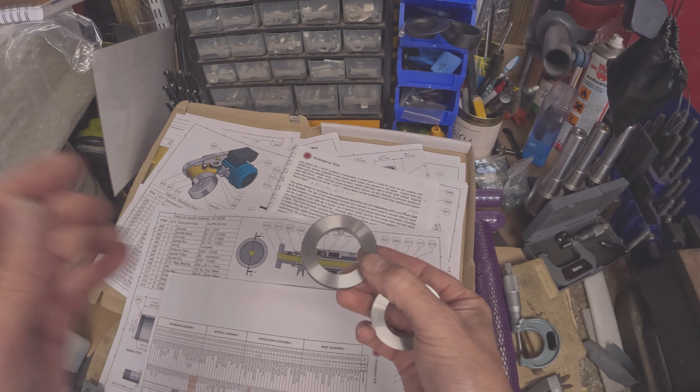Well, we've done all our other little bits. Oh, let's get it in camera. I ended up doing a bit of recording on my phone, if it turns out, because I forgot to have this camera here. This is a little nylon pip, it's looking a bit mucky.

It fits in there, fits on the column. There are little slice marks in it. It's supposed to be a bit of cushioning for when this column sits on top. Like I say, these need marking.

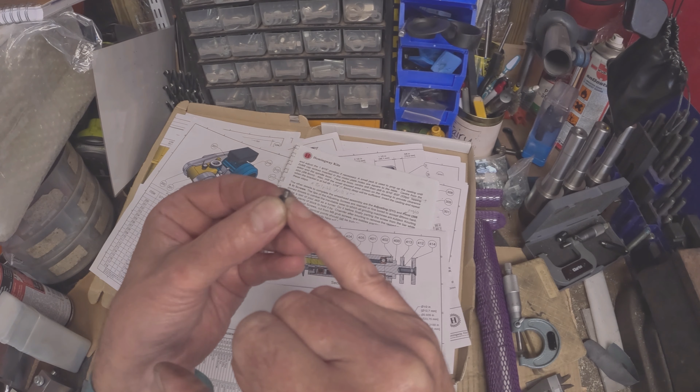I've Loctited these in now, and there were a couple of little grub screws as well with some hardened pins put in. I've not cut these down to size yet. I'm going to make a little holder out of aluminium, put them in a split collar, and nip them off at a later date, just little bits.

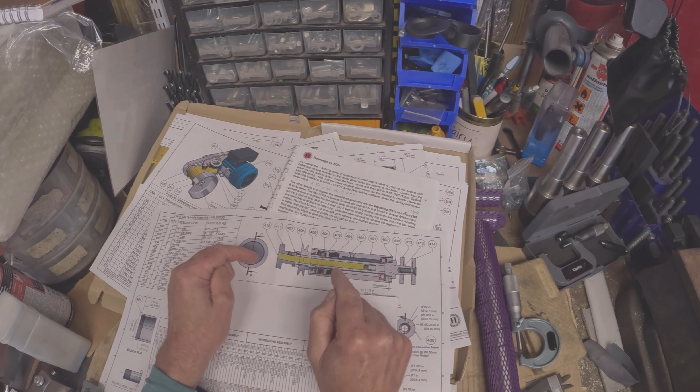What I'm going to try and get on with now is the spindle, the actual spindle that fits in this. Have a look. Obviously it goes through the housing that I did.

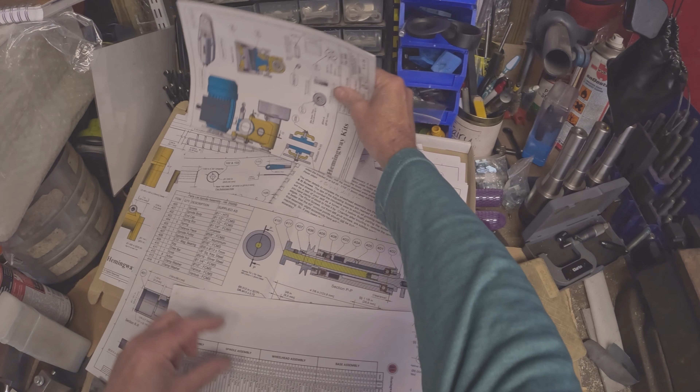Now this is the outer, what do they call it? This is it here. There's the pulley side, there's the wheel side. You've got your inner spindle actually. What will they call that? It says 412, that's an arbor. 400, that's the spindle, and this is 401, the spindle body that we'll be doing next.

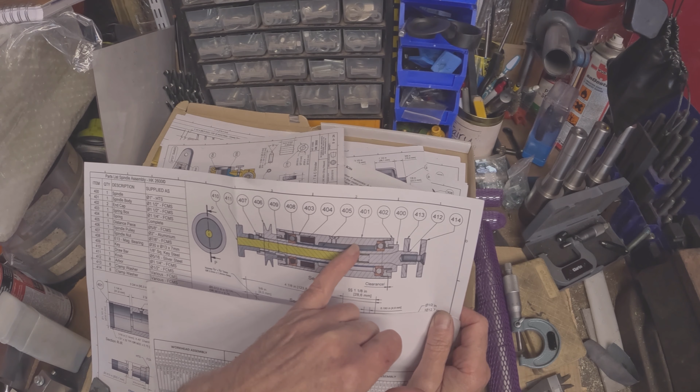Now, it does say out of 1.5 inch steel. I've been through the box, I can't for the life of me find something 3.5 to 3 3/4 inches long, so it will have to be about 4 inches long. I don't think I've used it for anything else because I can't find anything else I've used it for.

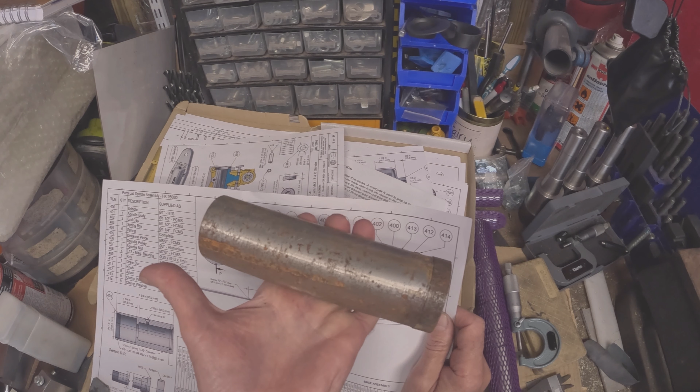I've made my arbors out of material I've got here, either mild steel or possibly EN8. It'll do. It says free cutting mild steel for the body, but it'll be a little bit harder. I think this will be EN3, which will be mild.

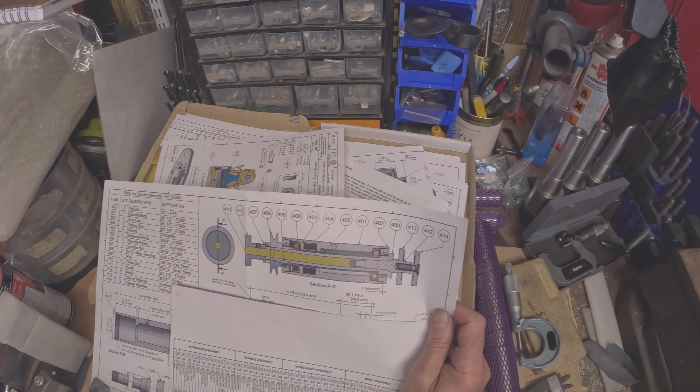Now this has 2 bearings in, 2 AC bearings, I think they're AC bearings. 408 mag bearings, I think they're AC bearings, just like I say, you can take the slack up out of them.

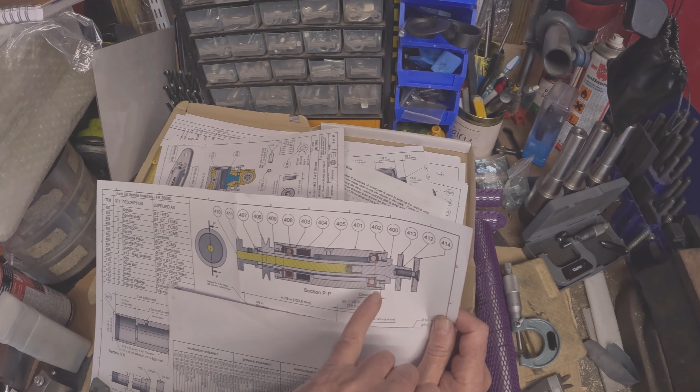Now this end, it says they are clamped to the body, the spindle body and the spindle, which in other words to me means that they're pressed in or slightly tapped in. Anything more than pressed in I think won't be doing them any good.

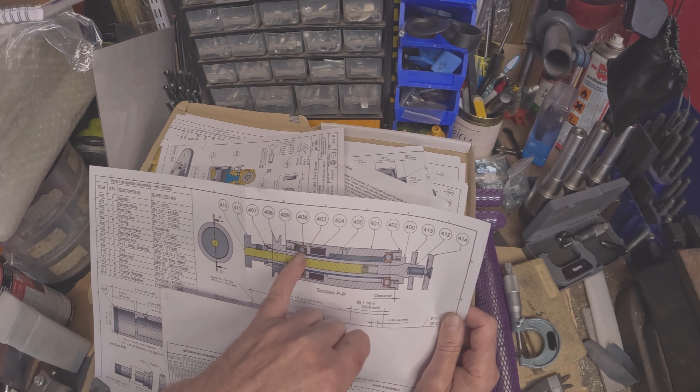This end, the inner race is tapped onto the spindle. The outer race, so I think it's supposed to be almost like a slide fit. You have a spring inside here that I think I've got to make, I'm not too sure. And then you can take the tension up with it, as I'm understanding the instructions.

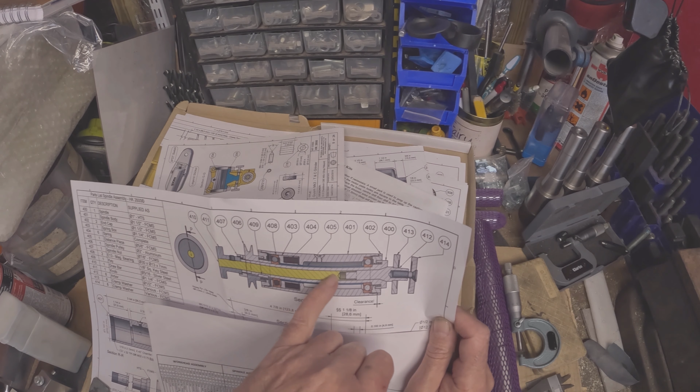Yet there is this little blue line, if you can see this faint blue line. Now that's a sleeve, and that's on the inner races. So the inner races will be a fixed distance. That outer race will touch that wall, that'll be fixed. Yet this outer race will have this spring adapter in, and I'm assuming there's a little bit of play.

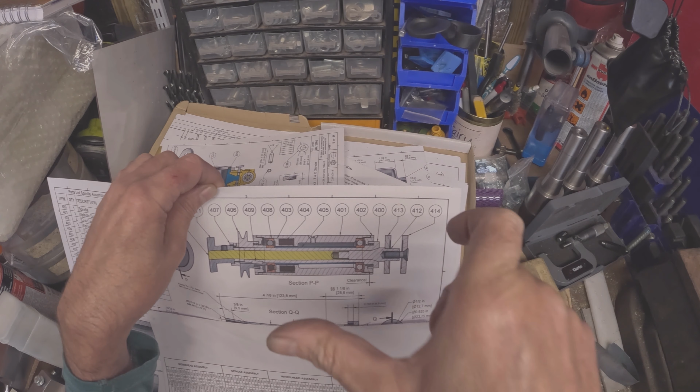It says, it does mention in the book there, you can just take a bit like end float up, and it does assist it for when it warms up, cools down. It's supposed to keep a constant pressure on the bearings.

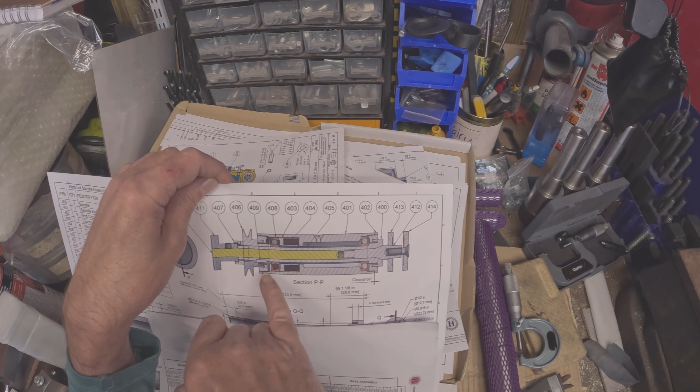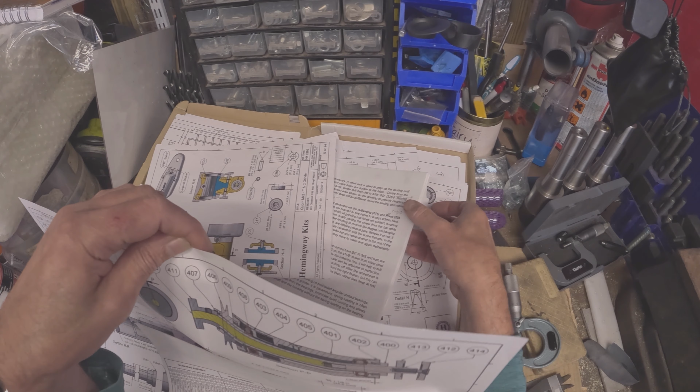Now we've got some very fine threads on either end here. I think I mentioned before what I'm going to do, these end caps on either end as well, obviously for the thread, but I'm going to cut first off just to size. I think it's 32mm by 0.7, or the imperial equivalent, whichever you want. It does mention something in here, it goes on about having a spring box, like I say.

Yes, it mentions something. You use magneto bearings, and it tells you about the length of material they give you, turning it between centres. Well, I won't have to, as long as I get the thing right.

I'll drill it out first, relieve it all, but as long as I get it running parallel, part it off, I'll leave as minimum as possible, and hopefully nothing will distort. We'll soon find out anyway.

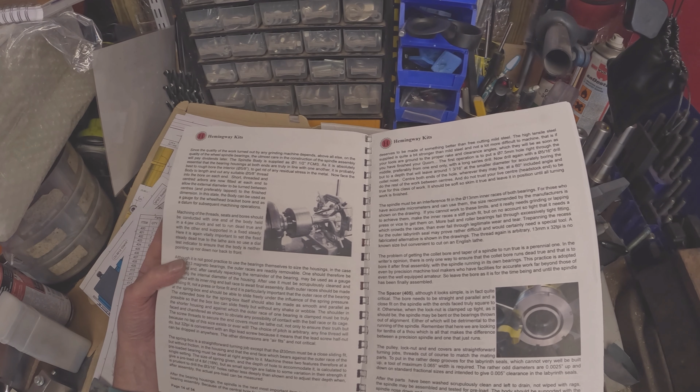Trying to find where it says about the thread. It does mention somewhere about the thread. Can't think. Never mind, we shall get on with it.

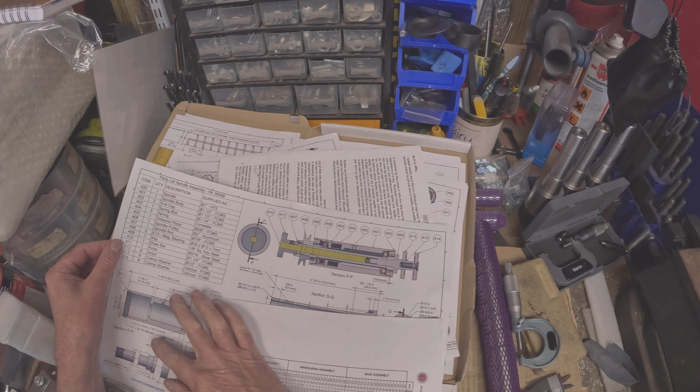There we go, it's 32mm. Let's click you back on. It's 32mm by 0.75, or 1.25 inch by 32 threads per inch. My lathe will do either, so since I've got some fine metric tips, it's going to be by 0.75.

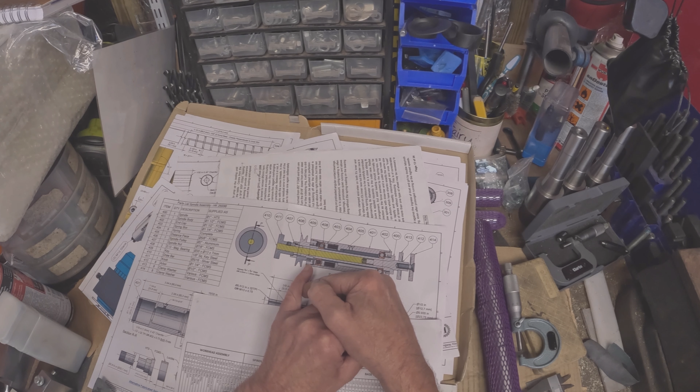What I'm going to do first is turn myself down and make a male gauge for the thread, and then when I screw cut the body, I'll use the gauge. I'll obviously have to touch on, go down my nominal depth.

I am using indexable tips, so they will top out, obviously get to the crest of the thread. I'll go down the fixed amount, and then the inner thread will match the bung that I've made, or the gauge I've made.

Then obviously when I make the end caps, they'll be turned to make sure they screw into the body. So it's a little bit of customization in a sense, but that's the only way I can think of doing it. There's no fine threaded nuts for this kind of thread. It does mention it's a kind of custom thread, a very fine thread.

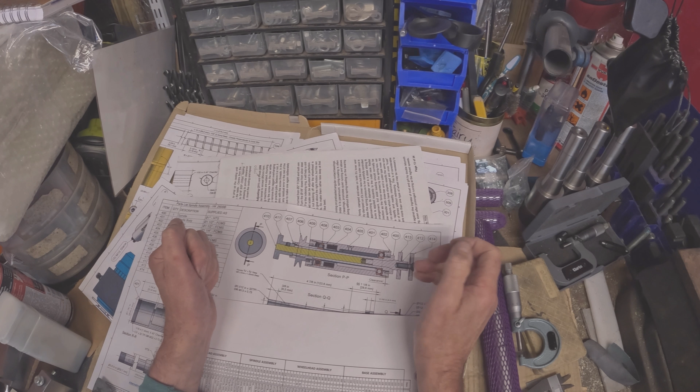So the first thing to do is get a piece of material in. I am going to relieve it through 5/8, and then turn it, get a centre in the end. I'm going to turn the end ever so slightly so it's not rough, and do the OD the full length, attempting to get it as parallel as possible.

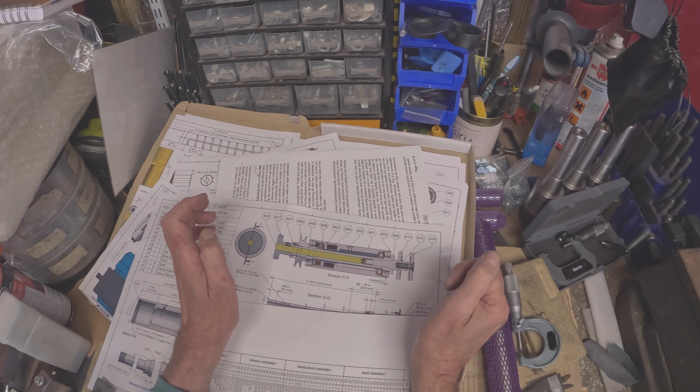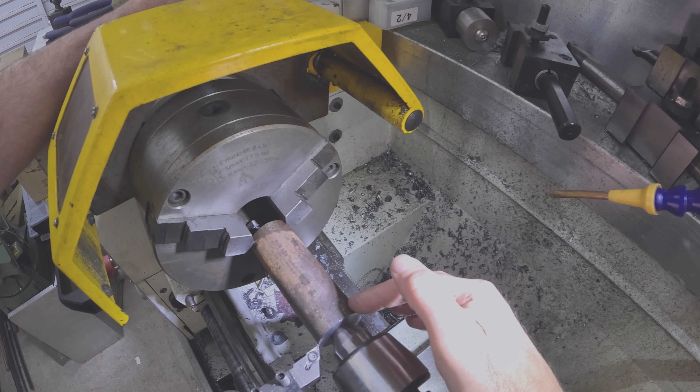Anyway, let's get this thing on the lathe. Right, I've got this piece of material now. I've gone through it with the 5/8 drill just to relieve it.

I'm just going to skim the face up as much as what I can here. It's long enough to hold. I'm not bothered if the centre isn't true at the moment. What I want to do is take a skim, get it parallel from there to there, and then work down to the size.

I think it's 1 3/8, but it's going to be a finished size for a good slide fit in that top bracket. And then, like what it says in the instructions, I can work holding this, clocking it up either end. It tells you to flick it up to length.

It's done in a 4-jaw with an arbor on smaller lathes, because you obviously can't get it down the spout or anything. This will be perfectly fine for what I'm doing, so we'll get it down to size.

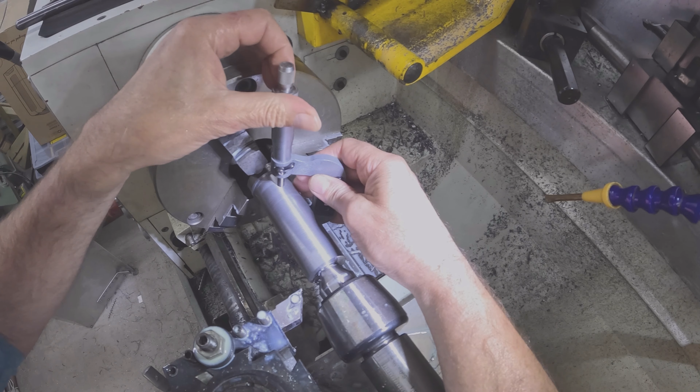Right, we've altered the centre a few times. I managed to get, I'm aiming for 34.9, but as you know, there's a bit of lapping needed to make it fit. So I've got 34 point, just over 34.93, nearly 5.

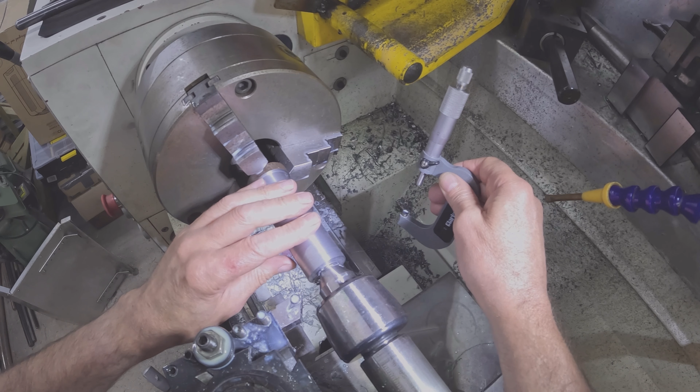34.94, so there's a little bit of lapping to go on now to get the bracket to slide on.

Right, so obviously a bit of lapping in later on, and this is the bracket fitted on there. And yes, it does go on both ways. That's quite good, I'll have that.

I shall just go over that with a bit of Scotch Brite, because it was nicely shiny before.

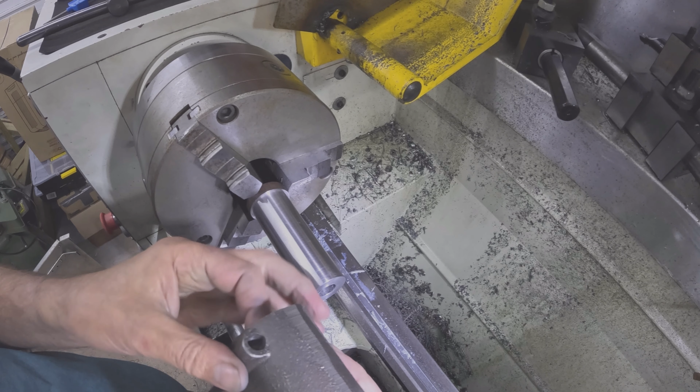I'm going to do it lightly because the OD is now finished. In essence it is held in there, and then the spindle goes inside it, but even so I don't want it to grow, shrink or anything if I can help it. I left it long enough after I drilled it, cooled it down, and it's quite cool now anyway. So a little bit of polishing, then on with the rest of it.

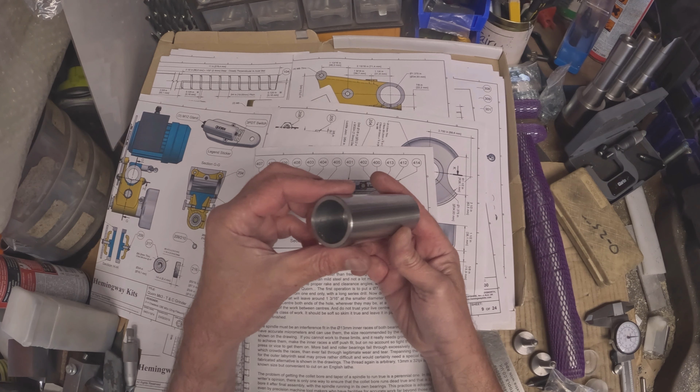And I've done the counter bore, the big counter bore. I've left a millimetre in it. I took it down to depth. No, minus 4 thou, I think. Just left off 4 thou. And just left it, let it normalise.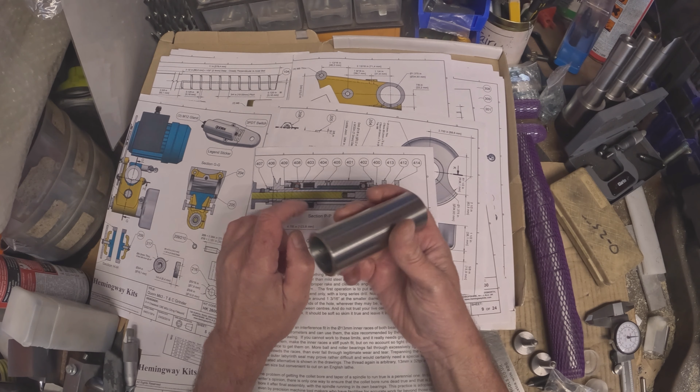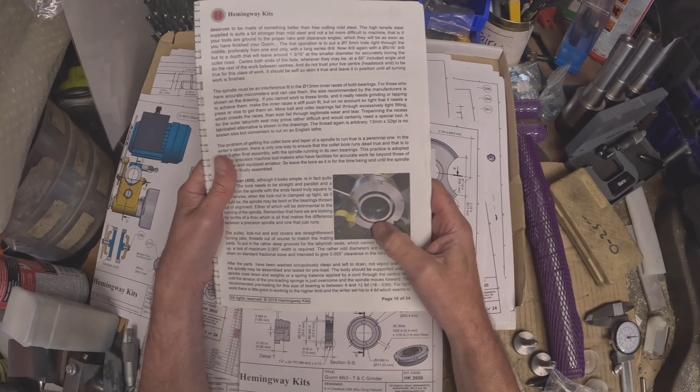Now, it's going to have these threads in either end. I am going to make myself a gauge. What I'm going to do is, it doesn't explain it in here, but if you look at this drawing, it's very well when it says about these labyrinth seals here. You will, what is it?

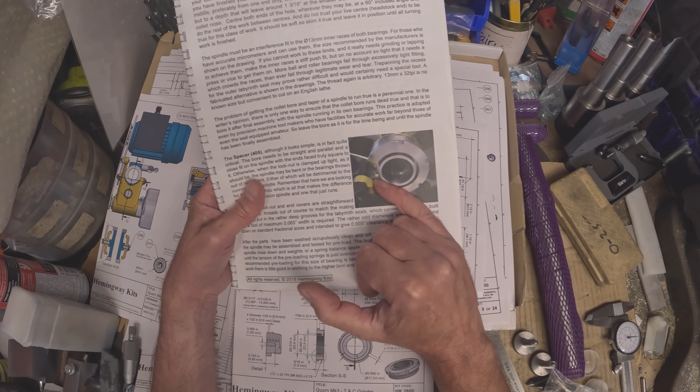They cannot very well be built up. A tool of a maximum of 65 thou width is required. That's all well and good. If you look here, he's got a nice indexable tool on a holder with a carbide end by the looks of it, that's all formed up and ready. I haven't got one of them, so I'm going to bloody well make one.

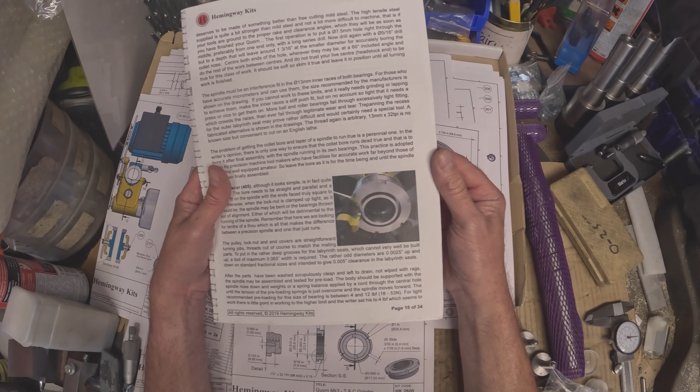It's 4.9mm deep, that. I can see maybe a couple of attempts at this, but anyway, looking at that, it looks like it's then been screwed into the body when having this side done.

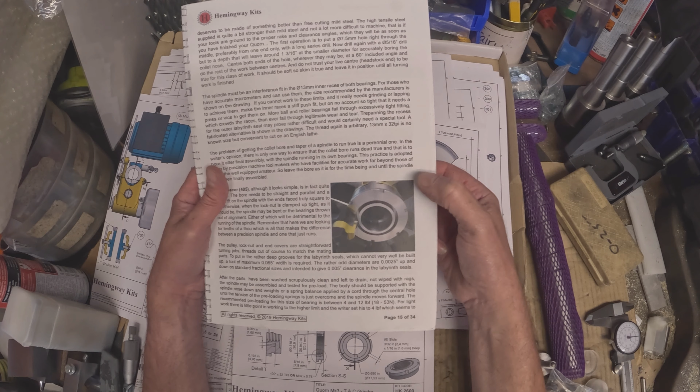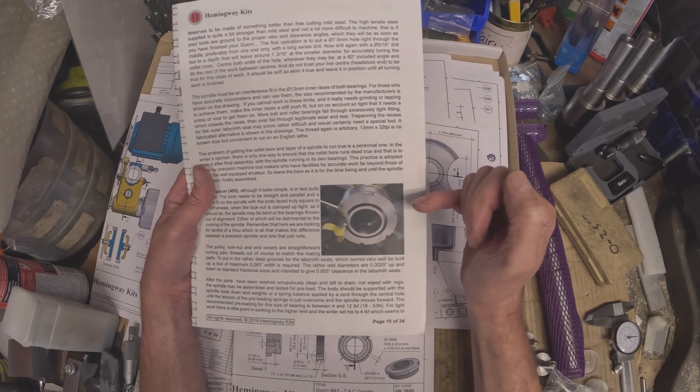It doesn't mention anything, but looking at it, and if you think about it, you put your body into your chuck, you can see on the drawing here he's got some very fine pieces of maybe copper or something. He's tapped it true, got it true in a 4 jaw, looks like a 6 jaw in there possibly. But he's got that outer spindle body running true. He's screwed these in.

Then I would say, looking at it, if you finish turning off the bore of these, they call them lock nut covers, and put the labyrinth seals in there, they should effectively be running fairly true with this body, because you've got 2.5 thou clearance in here.

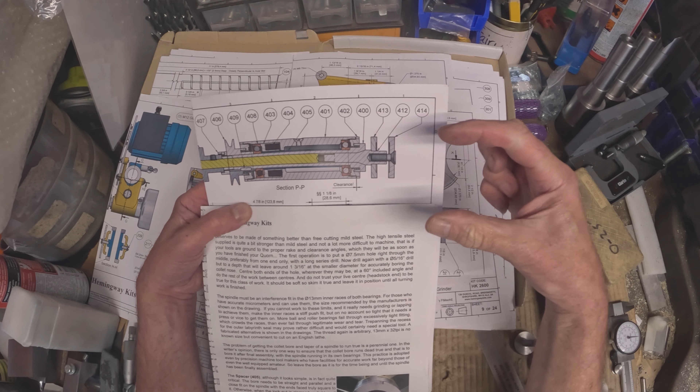How the labyrinth seal works, this spindle slides in slots. This slot here, it's sliding over it, and it says it will run, but when you actually look at the sizes, you've got about 2.5 to 5 thou clearance, which isn't a lot.

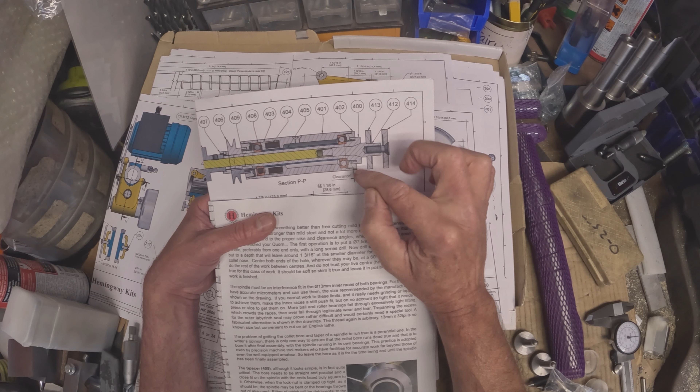And I would say the best way to do it, to get it as concentric as possible, is the same as them. I'm going to do a dummy one of these now with a male thread, and I'm going to just do it to size, and then I'm going to screw cut this to the dummy I've made, or the gauge, whatever you want to call it.

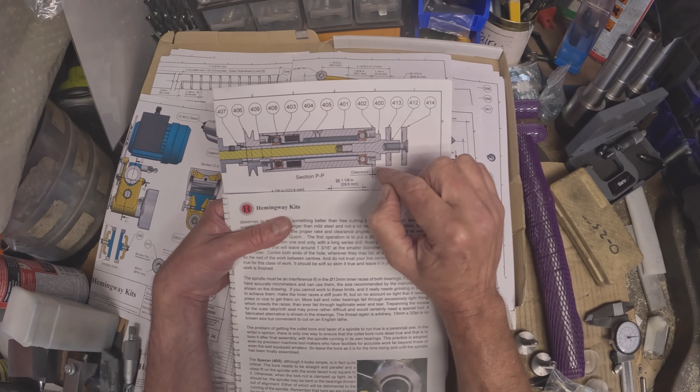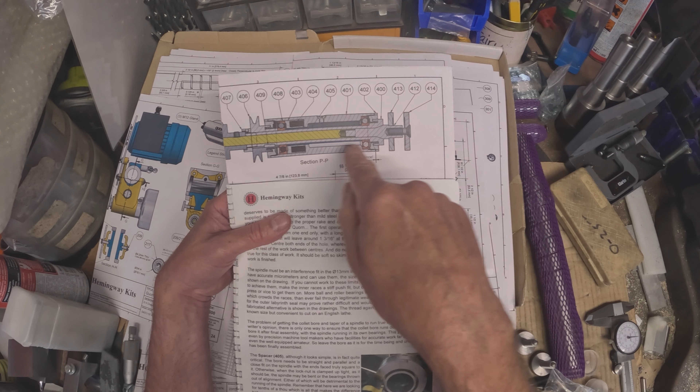And then when I screw cut these two, I will use this as a gauge against them. Hopefully both ends will then fit each other, and then I think I'll be doing what they've got on here, is finishing them off and this groove while it's held in the body.

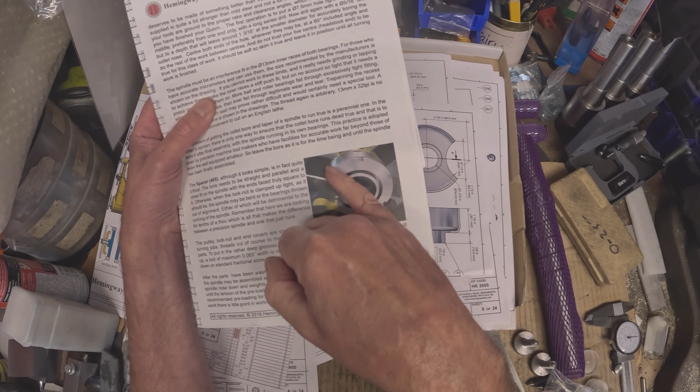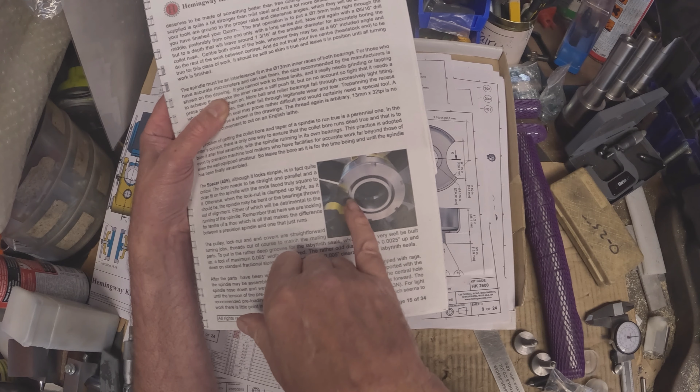I don't really want to, because I don't know how much strain or anything else it's going to cause when I start to do this groove. I'm going to have to be very, very careful, because I don't want to put any pressure on these threads, and I don't want it to lock up either. But I might just have to give it a go and see what happens. Anyway, we'll crack on, see what turns up.

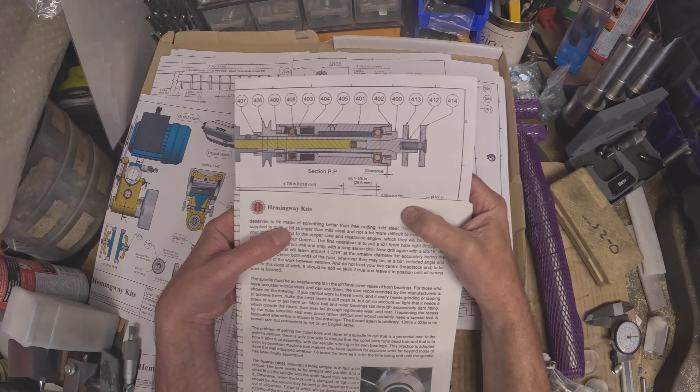I've got this piece of free cutting mild steel for making these locking nuts at the end. Clocked it up with inside a thou. It does run luckily within a thou.

Rough bored, so I'm going to first off rough this out, and then I'm going to turn it to size. It's a 32mm by, what's it now, 0.75. I'm going to try and turn it about 02 under 32, and then I'm going to do my other one the same.

I have got indexable tips, so I'm going to use my DRO and go down to the full depth of whatever 0.75 pitch is, and then that will be it. That will be used then as a gauge. But like I say, I'm also going to turn it. I'm going to finish the bore just shy of the finished bore for one of the locking rings, so I can also use it as a backup as well. And I will try and have a practice with it when I do the face groove on the other side. That's the plan.

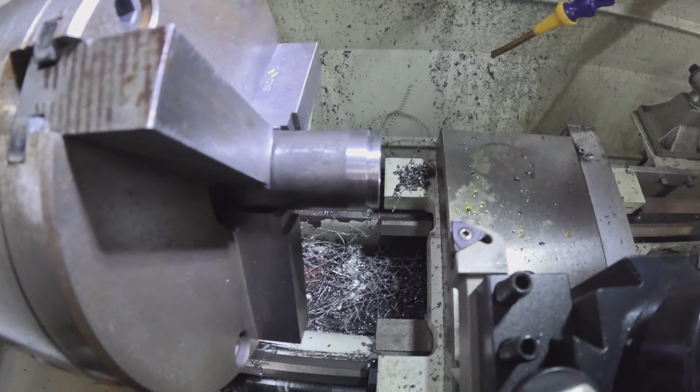Well, I've got my compound set up at 60 degrees. I've checked it with a protractor because I don't trust these marks on here, because I know they're out. And I've got a very, very small indexable tip in there, 0.75 for this pitch.

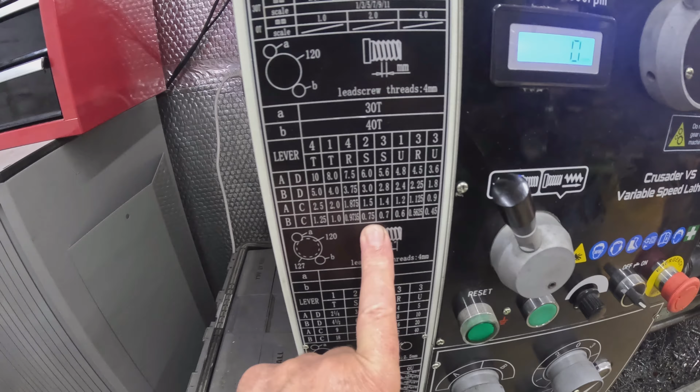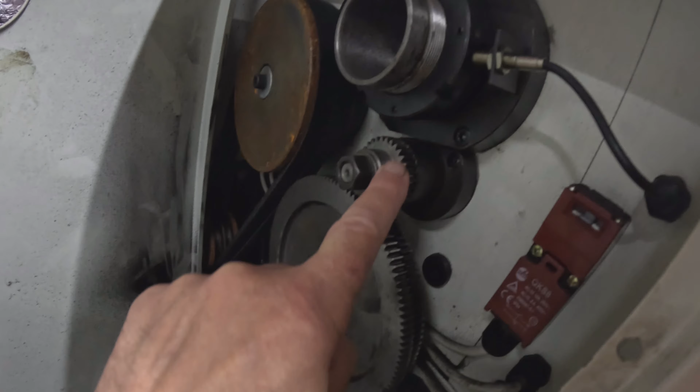Now, my lathe does do 0.75, but it says on here that the gears should be a 30 to a 40 tooth. Now there's your 30, that is definitely not a 40, that is a 60. That gives me a lot finer thread.

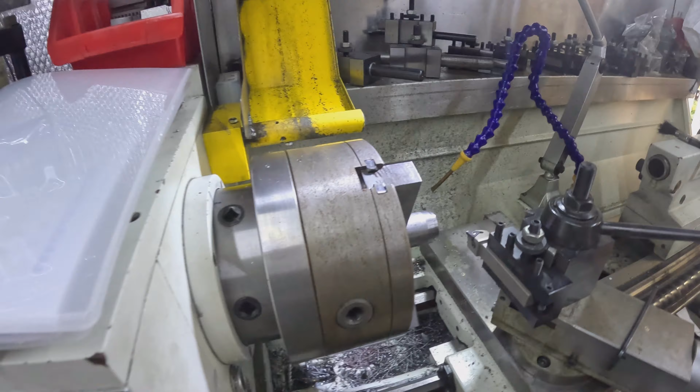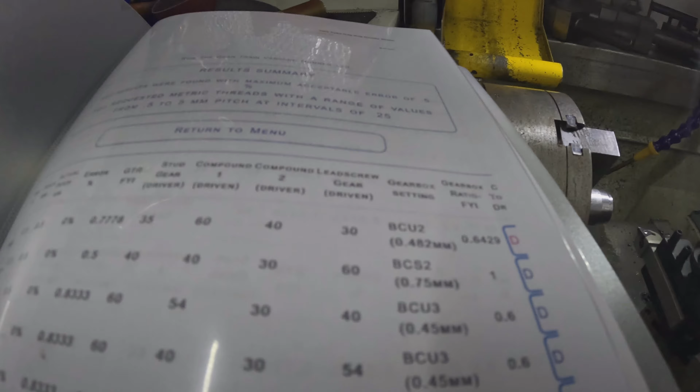Instead of swapping the gears around, I probably mentioned this before, I've used this software - let's just go back onto the table. I've used this algorithm that is Ride the Gear Train by Evan Lewis. I think that's right. Evan, if it's wrong, I'm sorry.

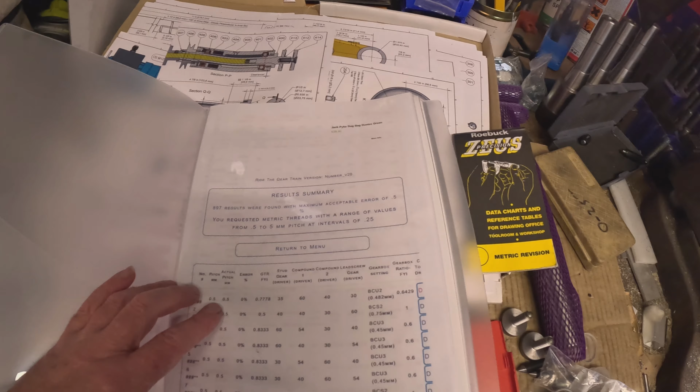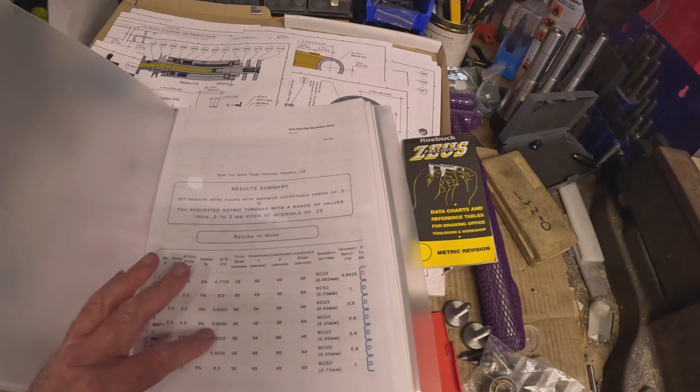Now, you put all your data in there. I might have mentioned it a few times, you put your wheels in, your gear, your driven, your driver, your driven, if you've got anything in between, compound gears. And I did this a while ago from 0.5 to a 5mm pitch, just for the fun of it, at 0.25 intervals.

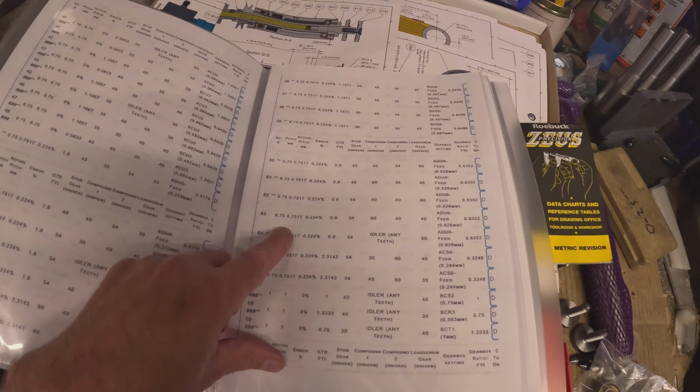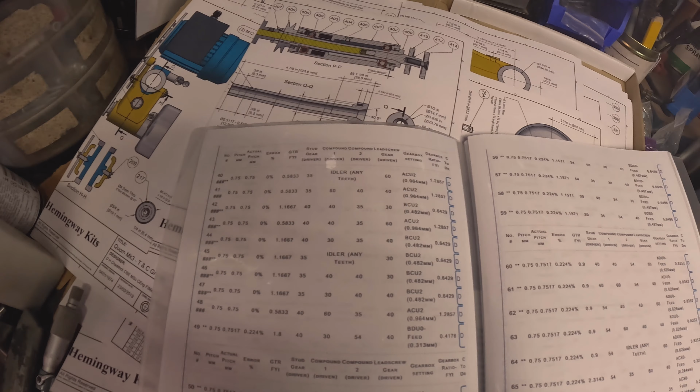Now if I hunt through for a 0.75, it gives you all different gears. Where are we? Oh, sorry, I'm in the wrong place. No, that's carrying on 0.7, but there's loads of the damn things. We start up here. Now, I'm looking down here. And we start on this page, actually. That's what I mean, I've got about 20 odd pages in here.

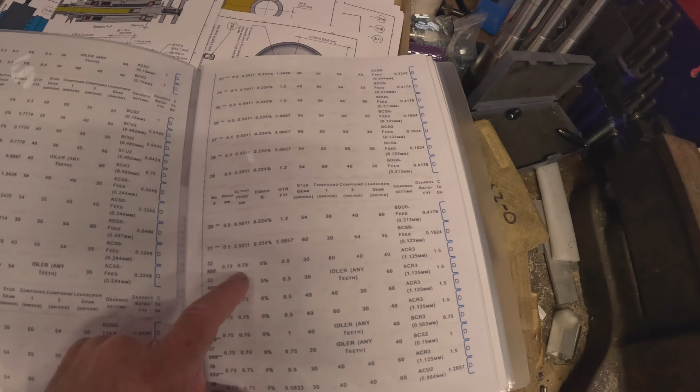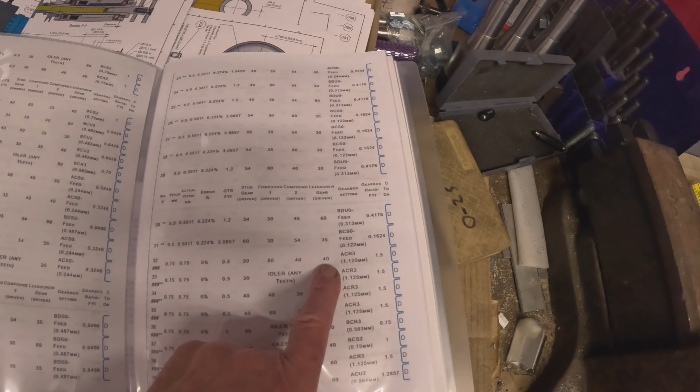There's loads of them. Now, as I go down 0.75, my driven is a 30. It says any teeth for the idler, and that's a driver, sorry. And the driven, there's me 40, but there's a 60. And it also tells you on your gearbox, and I've forgotten how this is worked out. It's beyond me, I'm just following what I've got down here. What it says, set it on the gearbox, and what actually the gearbox it's set to.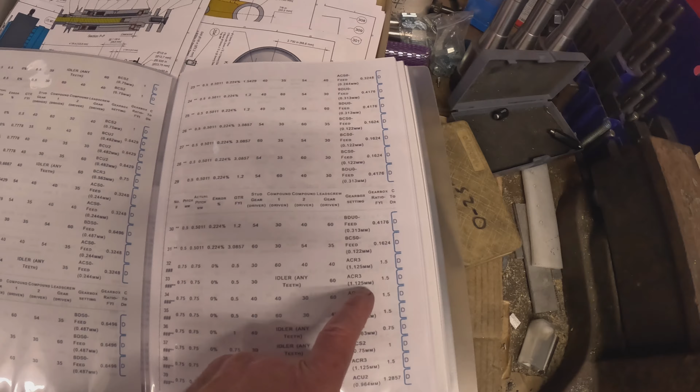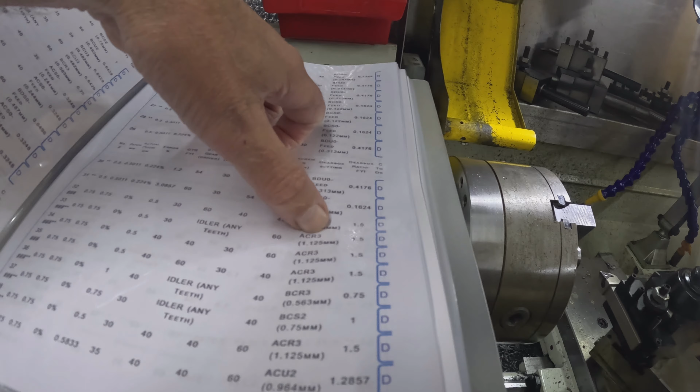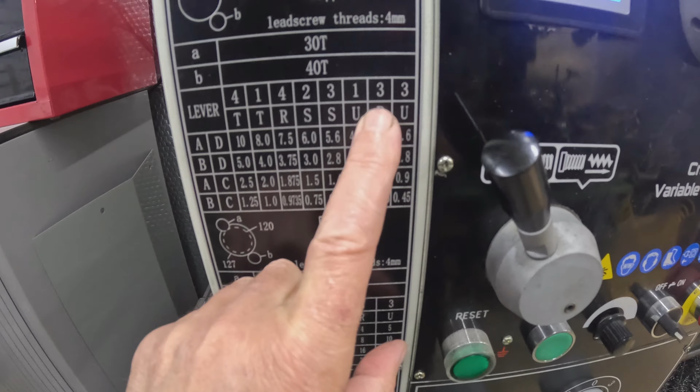So we go back, and it says if I'm on a 30 any idler, which it doesn't matter, and a 60 ACR 3, it's 1.125. Get rid of that. There's me 125 there, AC R3. Now, to double check it...

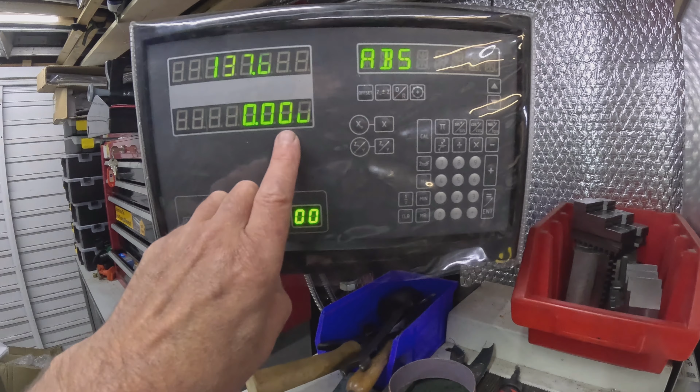I've got this in gear now, and I put a felt tip mark there, and I've got my Z set at 0, and I've got this engaged, and I've took the backlash out. So I'm going to turn it by hand, come up to 1 revolution.

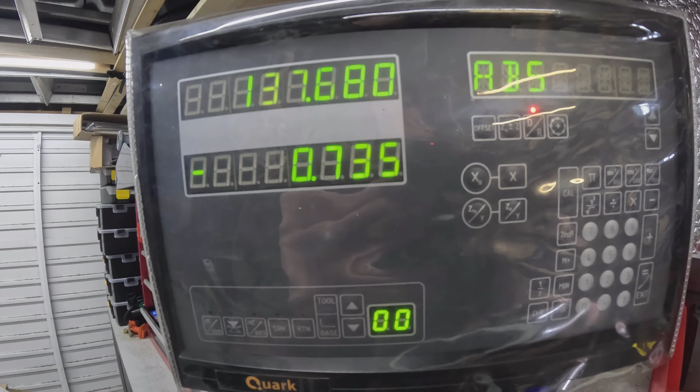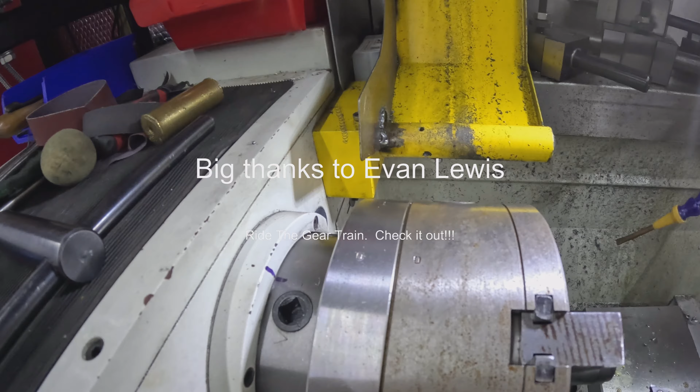Alright, I've got 0.73. I might be a little bit out with my revolution, but if you think that's 0.015, I might be a touch out with that. It hardly makes any bloody difference. So that's right with that, I'm not going to argue about 0.015. I think it's probably just where I started it off from.

So I'm going to touch on, I am about 02, 03. I'll check it again with the mic underneath. I'll get a scratch on, and then I'm going to go down to the depth of whatever 0.75 is, and I think it is about 0.9 something on the diameter. So anyway, I'm going to set it all up and get ready for that.

Right, now that is just scratched, and I mean just. I actually touched on with a piece of emery paper, and I was 07 off then. Right, now looking in the old Zeus book, got 0.75 pitch there, and the depth is 0.46, so double it up, it's 0.92. So I'll set my DRO to 0.

Now I've put myself an undercut there. How do I know whether we've got the right pitch? I'll have a look.